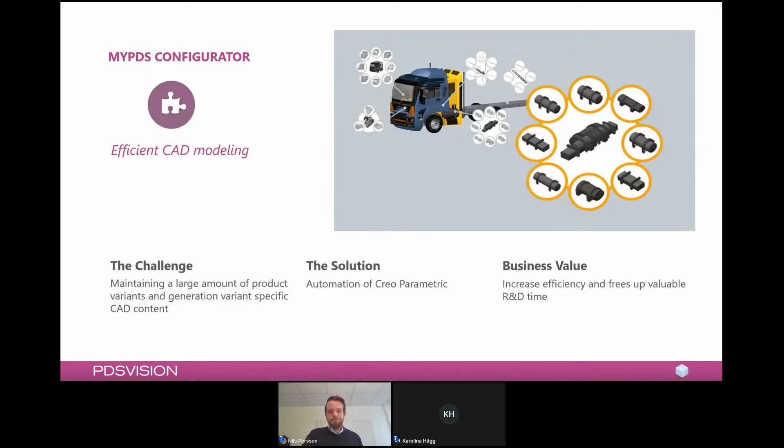In essence, myPDS Configurator can utilize almost all of the features within Creo Parametric. Models can be built very robustly using skeletons, requiring no direct reference between modules. It can also utilize reps, zones, interfaces, style, combined states, flexibility, bulk items, and much more.

It's an easy, intuitive system with conditional inputs that can be controlled for placement of components, for include and exclude of different components. We can edit parameters, we can define what type of exports we want to do from Creo, and this could be anything from the assembly model to drawings to Creo view formats.

Or any neutral file formats available to export from Creo Parametric. The out-of-the-box interaction is based on Excel today because it's easy to get started with for anyone. Many users are familiar with the product and companies already have Office licenses, so you can get started directly. Excel also supports a lot of advanced features like Visual Basic macros and integration with external data storages that can enhance the usage with small development efforts.

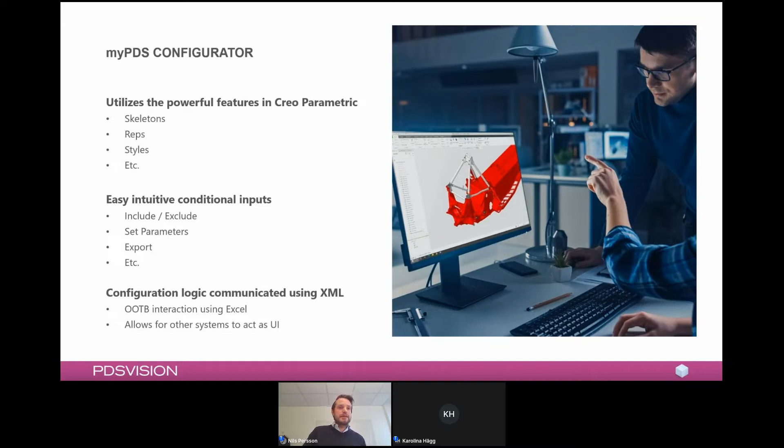So just to give you an idea for those new to Windchill option and variants, commonly this is a module in Windchill to start with, and typically you build an overpopulated BOM within Windchill that holds all of the modules that are possible to pick within a product. We commonly call this a 150% BOM. It can, of course, be a 1,000% BOM, it's not specific to that, but it will hold all of the possible modules that can be added to a product or picked in between.

Then apart from this, there are rule sets that keep track of what combinations can be used. And when a user inputs the specific configuration for a customer, or when you're going to generate a variant of it, a variant BOM and a variant specification will be created.

And this only holds the specific modules that were picked for that variant. So option and variants can keep track of all the different rule sets, but also the modules and the logic to it. And just as any other object within Windchill, it's version controlled and can be iterated.

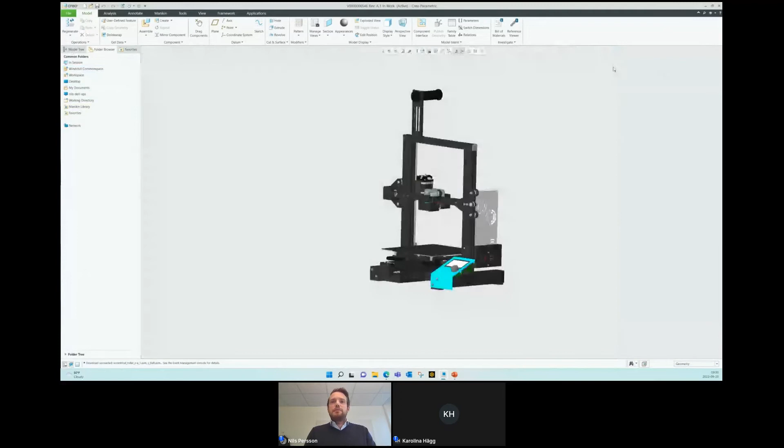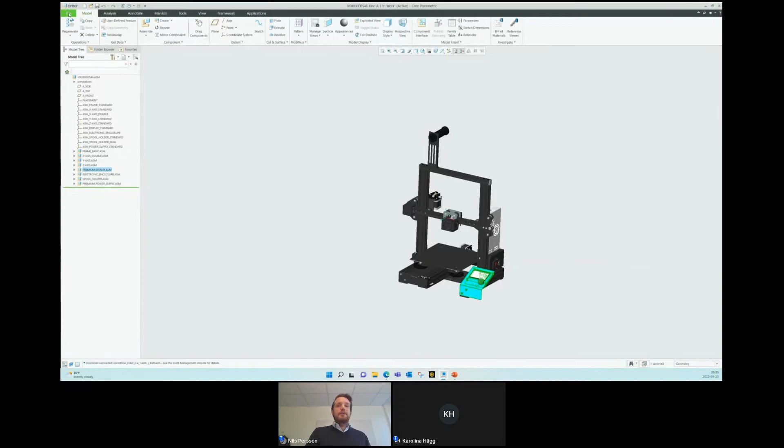We can see that the model now holds various options, the premium display that I picked, for instance, and the various options that we had taken. In the end, this was also automatically uploaded towards the variant-specific bill of material and connected to that. But as mentioned several times now, it could be the assembly, but of course you can output other types of formats - it could be a variant-specific drawing.

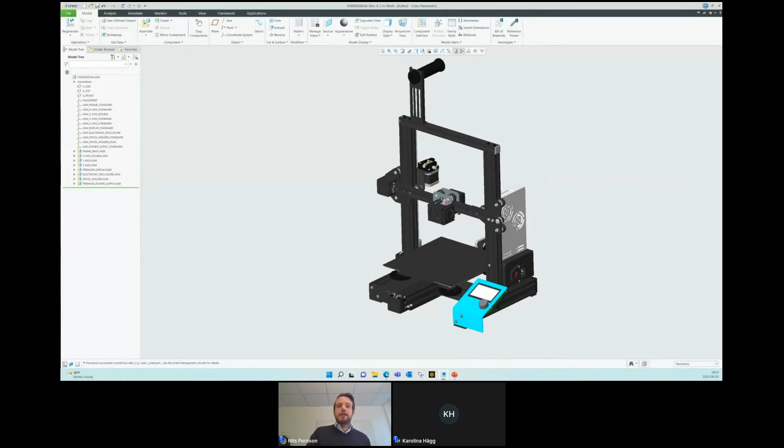We can also use attributes from Windchill to drive different dimensions to this - widths or height, for instance, of this bed could be an option to it, or anything that sort of affects the geometry based on those inputs. And I think that is one of the strong differences, or what this product sort of adds to option and variants as well.

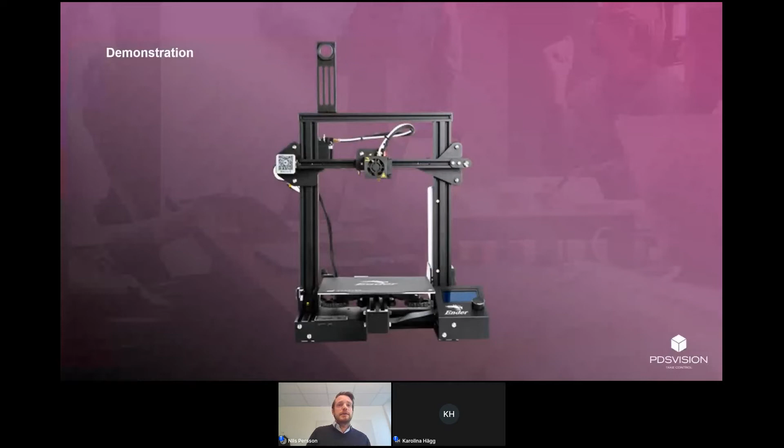So I'm going to jump back, but now you have an idea of how we can interact between these two products and some of the capabilities it's capable of. So in essence, just to underline what myPDS Configurator adds to this is that we do not necessarily need to use an overloaded BOM on the CAD side. Instead, we only add the selected modules and parts to a template model, so it becomes a very lightweight operation, and also quite a simple template model.

We can position the component by constraints and coordinate system, which gives us a very robust positioning. Modules can be edited after the model generation, and the position change updates automatically when the model is regenerated. As you saw, we can create new variant parts and assign parameter values to them. This moves us closer to configure-to-order designs, something that has been really hard for us to address in the past.

We can also create assembly drawings. I'm sorry, I was supposed to show you this in the presentation as well, but that is of course fully possible. And this is also for configure-to-order parts, so it could be with specific dimensioning towards it.

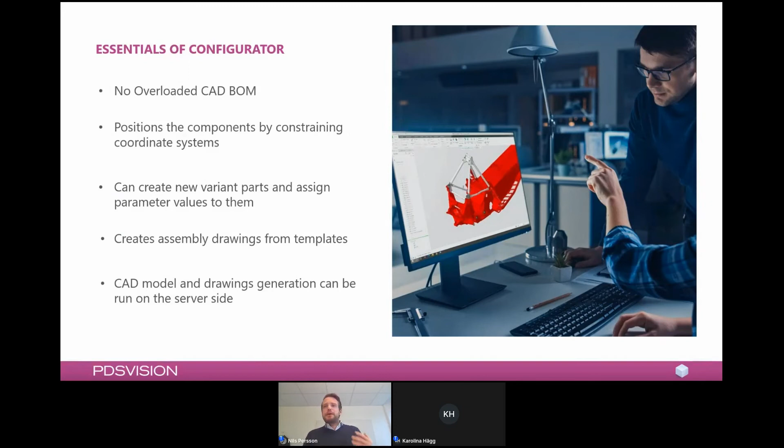Perhaps quickly on ATO and CTO - assemble to order, where we have different components that we can assemble into a specific order. It's more of an include, exclude, and how option and variants very much work. And in terms of configure to order, we can also set specific dimensions on this trailer, like the length of it, and how that affects other geometry.

This is where we are starting to move with this product and the new capabilities given here. So we'd say the great benefits here are, of course, time saved in model and drawing generation, and less development effort. If you need to create quotations, for instance - not the final product, but for a quotation you might need a bill of material, certain drawings, or a 3D model for visualizations or technical specifications. If you don't get the deal at the end of the day, all of that work might be of no use, unless we sell the exact same specification again. So being able to automate this process and generate it quickly could save a great deal of working hours that you can spend on R&D instead.

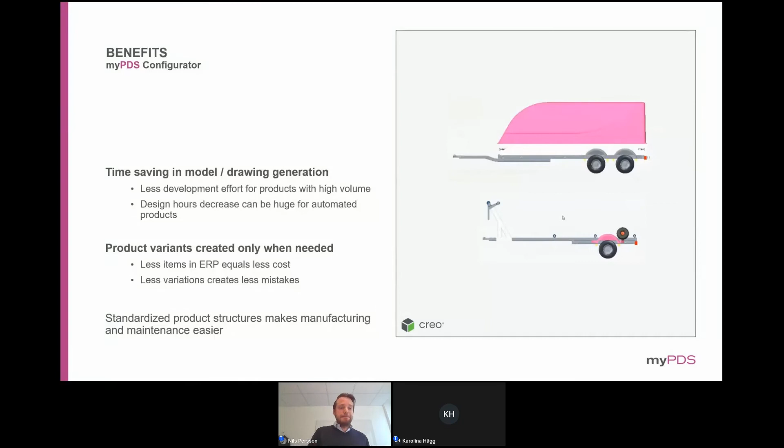In discussions with customers, we see that most times we discuss with R&D in terms of PLM and CAD, but there are so many other departments that could benefit from real 3D from the CAD. It could be on the sales side, generating quotations or information for the quotation based on this. It could be in simulation, where you need the CAD model to run simulation on top of it. Technical documentation for illustrations and similar. It could be for rendering photorealistic content based on the CAD model, and so much more, also for the digital twin part, creating Vuforia concepts and AR based on these as well.

So when do we think you can consider managing configurable products? One of the things is when the number of possible configurations becomes too difficult to manage as it grows too big. And as the number increases, you would need some sort of enterprise system or other system to help you keep track of this information.

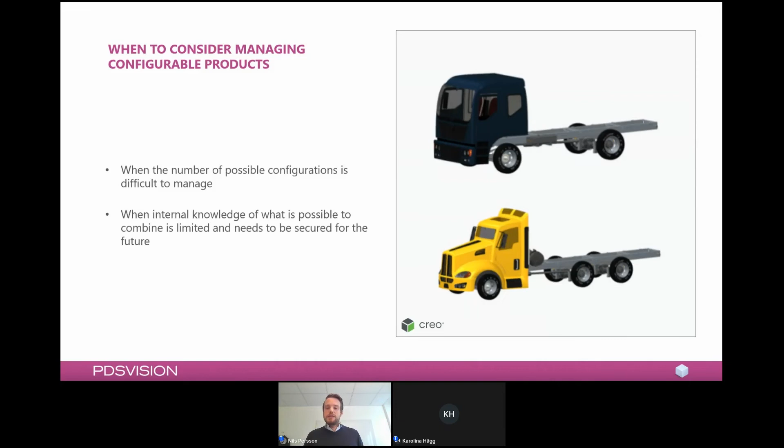Of course, we commonly position PLM and option and variants, but some customers store this in ERP or CPQ solutions or other database systems. Also, when the internal knowledge of what is possible to combine might be limited to a few key individuals - not only should it be more efficient to get aid from a system to track the possible configurations, but there is also an important part in securing the IP knowledge for the future. From what we see, it's not uncommon that a few key individuals have this knowledge, and by transferring it to an enterprise system, we can help secure that IP for the future.

Also, when you spend a lot of time validating these configurations, it is a big time thief, and it can also generate quality concerns in the end if the wrong combinations are put to market.

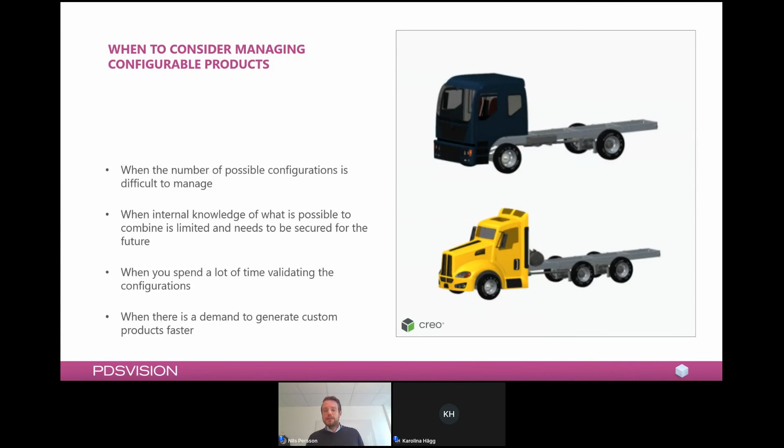When there is a demand to generate custom products faster, this can also happen in earlier stages of the sales process, where we need to generate structure models for quotation, for example. The time spent on that generation might be useless unless there is a sale in the end.

So with that, that was apparently my last slide. I wanted to thank you for taking this time. I hope you saw from this short presentation some of the possibilities that we can now make.

How we're sort of expanding our offering towards configurable products, and how we can combine option and variants together with myPDS Configurator to make up an automated workflow to generate, in this case, the assembly model, but which could be basically anything generated from Creo. Also, we can now handle dynamic dimensions in a way we haven't been able to do previously.